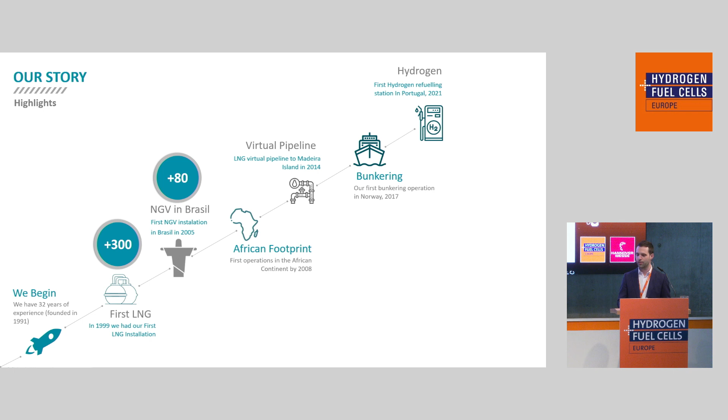In 2020 we opened the hydrogen business unit. We invest a lot, and we developed a lot of projects in power to gas, power to mobility, and power to X that I will show you after. Now we are trying to expand our activity across other markets, namely hydrogen, of course, and biomethane also.

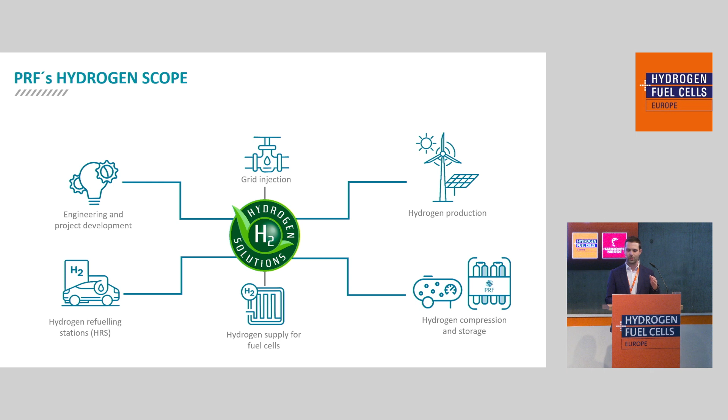So our scope in hydrogen - as I told you, we are a 32-year-old company with a lot of experience in the natural gas area, so we capitalize on that experience in the hydrogen field. We are able to do everything from engineering and project development, since the concept phase, until the installation and operation. Grid injection or power to gas project.

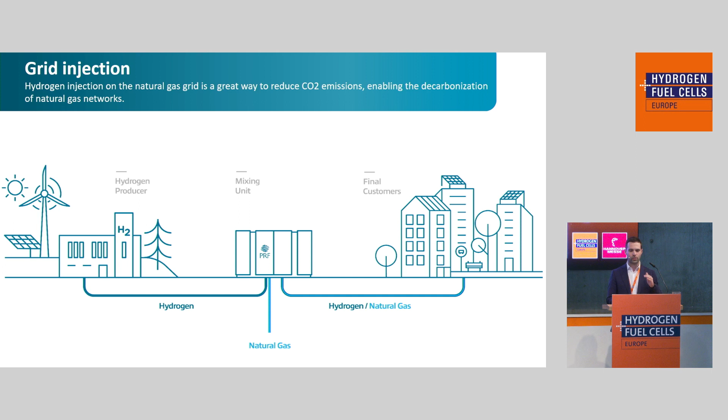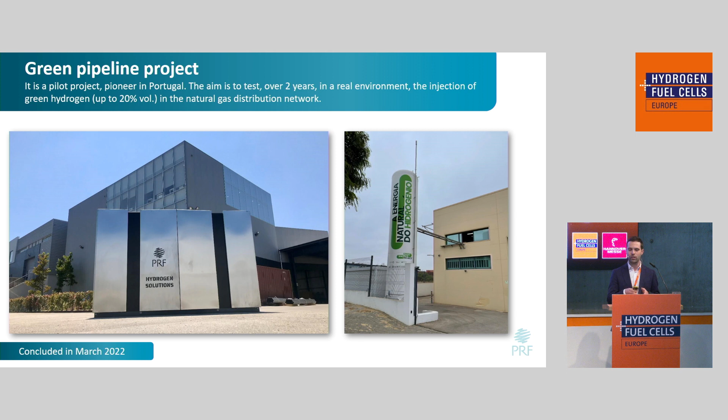It's a project led by the gas distributor in Portugal, Floene, and the goal of this pilot project is to test 20% of hydrogen in the natural gas grid. Here you can see the pictures of the installation. We receive 100% hydrogen, we mix it, blend it, and analyze it, and supply a closed network of 80 clients. Currently, we are injecting 10%, but the goal is to achieve 20% during this year.

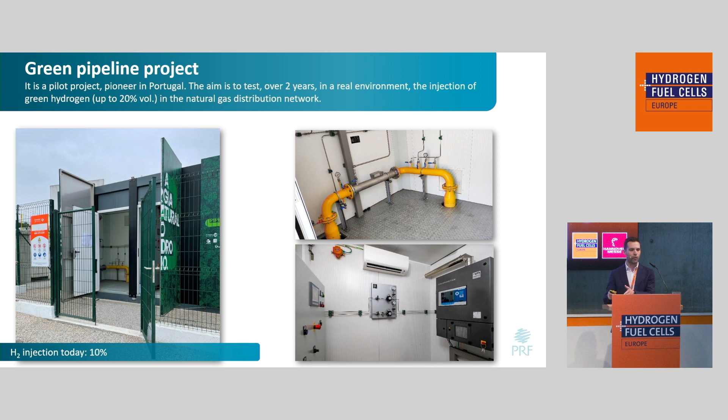The challenge - or not the challenge, but what we did - in Portugal our gas grid is very recent, so we used all the traditional materials for natural gas with hydrogen to verify that the network is ready to receive hydrogen.

Second topic, projects in mobility. In Portugal, until 2 years ago, we didn't have any refilling station, and we have a Portuguese bus manufacturer, Caetano Bus, that already has hydrogen buses. So in 2020 we invested a lot in equipment and in our engineering team, and we developed our first portable refilling station that allowed us to start doing refillings in Portugal.

We call it DRHYVE. It's portable, as I said, because we don't need civil works, no cranes, and the installation is very quick. It started as a 350 bar refilling station for buses only, but we developed close work with Toyota Motor Europe to be able to refill Toyota Mirais that we already have in our country. Some specs: since 2021, we already delivered more than 12 tons of hydrogen and more than 1,000 refillings.

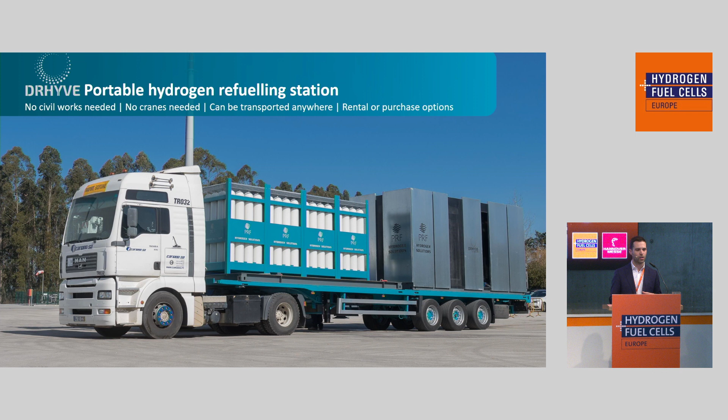This is the second version that I present to you here. The second version of DRHYVE is a portable refilling station, but in that one, what we did was develop our own storage. We manufactured our own storage, so we can be more flexible, have more capacity, and be able to do refillings in less time. This refilling station is for 350 bar also, but we already sold one of 700 bar for Spain and 350 bar for Poland.

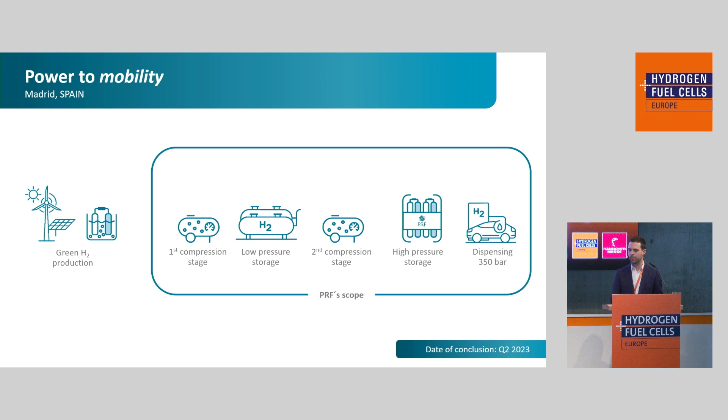Other important project that we are finishing right now is a hydrogen refilling station in Madrid. We don't deal with green hydrogen production, it's from a partner of PRF, Fusion Fuel, but we compress the hydrogen, store it, and refuel heavy-duty vehicles. We are finishing the installation, and now we will pass to the commissioning phase.

The first project, the DRHYVE, is installed in the Cascais municipality. Cascais won 2 hydrogen buses, but now they decided to buy 8 more, showing its commitment to sustainability and low carbon transport. So we are doing the civil works right now for a hydrogen refilling station with a 1 megawatt electrolyzer for local production of hydrogen to supply the fleet of 10 buses now, and they expect to grow up to 20 buses in the near future.

This is a project where we are finishing the engineering phase, so we will have a real mobile refilling station on wheels. It will be possible to test local fleets during 1 week, 1 month, so the customer feels what it's like to have a hydrogen car, a hydrogen bus, to make the final investment decision on a bigger station. Because it's mobile, we can install it very quickly, and the promoter of the project can deal with all the permitting needed, and during that time is already using the hydrogen cars.

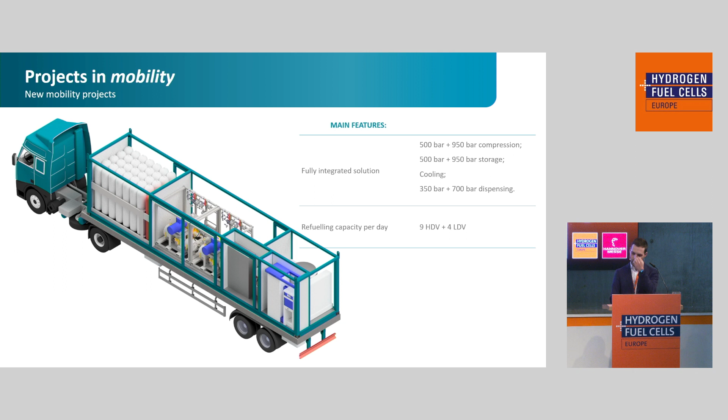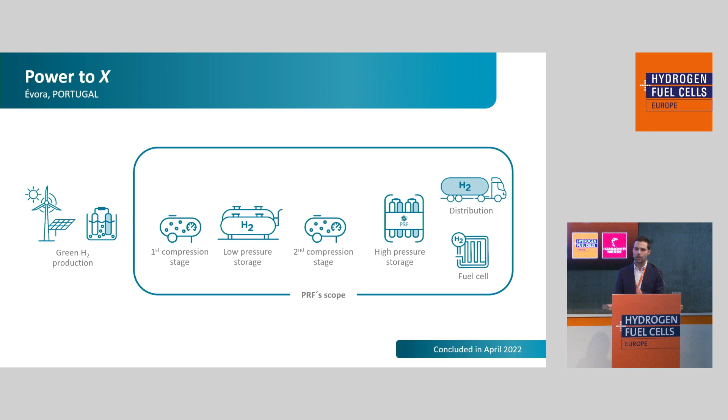The last project that I want to show you here is a Power-to-X project. We are not dealing with hydrogen production, but we are compressing it and storing it at 300 bar. In that case, we have 2 different outlets. We have a 100 kilowatt fuel cell that during the night injects electricity into the grid. And of course, as we have excess of green hydrogen, we can export it, for containers, for example.

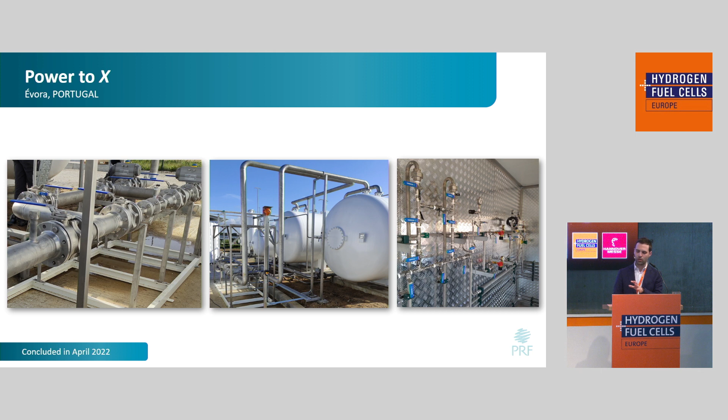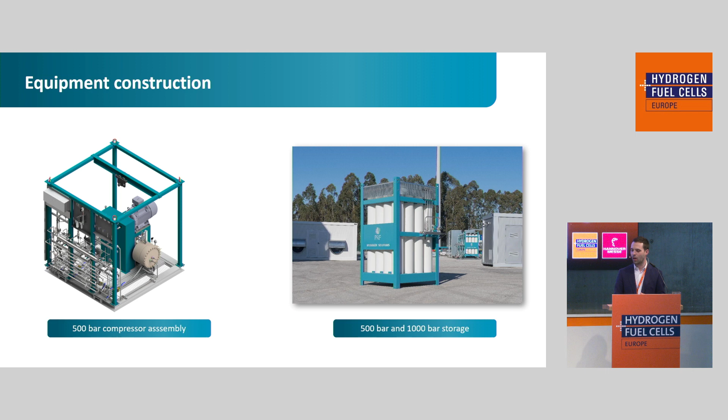These are pictures of the work done. On the left side, we have the metering of the hydrogen flow rate of the production, and we store it in the low pressure buffers, and we compress it to deliver to the fuel cell. Of course, this is only possible because PRF has a big manufacturing and equipment construction facility, so we are able to assemble our own compressors and our own storage, making it possible to have short delivery times in that business and deliver a product with very good quality.

And to finish, on top of that, we developed a web maintenance platform. We call it WeKeep. So PRF can offer help desk, corrective maintenance, spare parts stock, and also preventive maintenance. That is very important to keep the stations running with the least downtime possible.

So I will finish with a 1-minute video about these projects. I hope you enjoy it. And of course, I'm fully available to answer your questions in our booth in this hall.

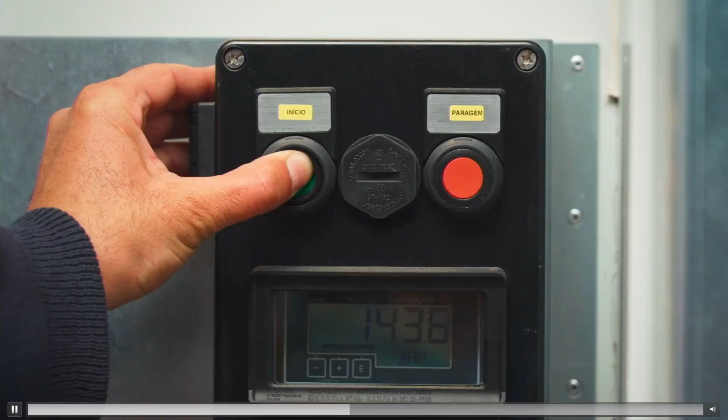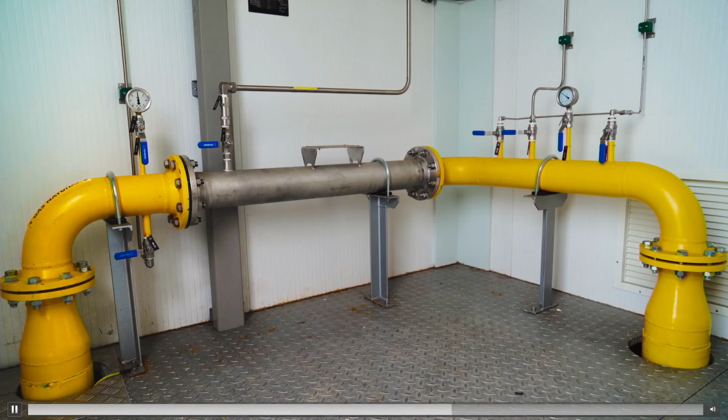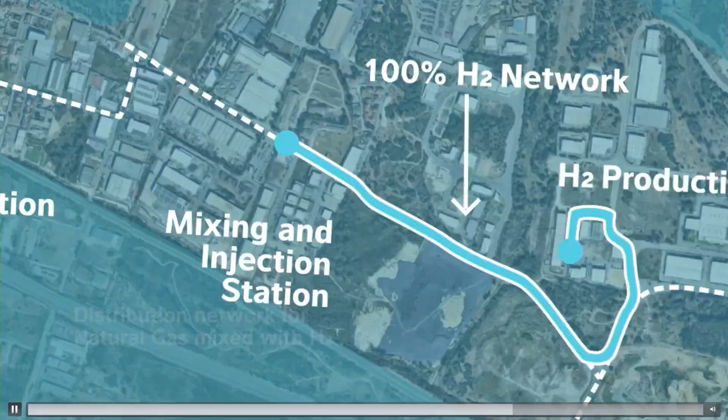We need energy every day. Energy to go further, to accomplish our projects, to fulfill our challenges. It is the energy that moves the world forward, and we leave a mark on the world with our actions. The world is constantly evolving, and with it, so is energy. As such, at PRF, we contribute to the energy transition with the fuel of change: hydrogen solutions. A clean and safe energy without CO2 emissions. The energy of the future today, with positive impact on society and on the planet. At your side, in mobility, in industry, at home. We build the future every day, a carbon-neutral future, greener and sustainable. Our choices inspire the choices of others, and thus we change the world. Move with us towards a greener future. Thank you.